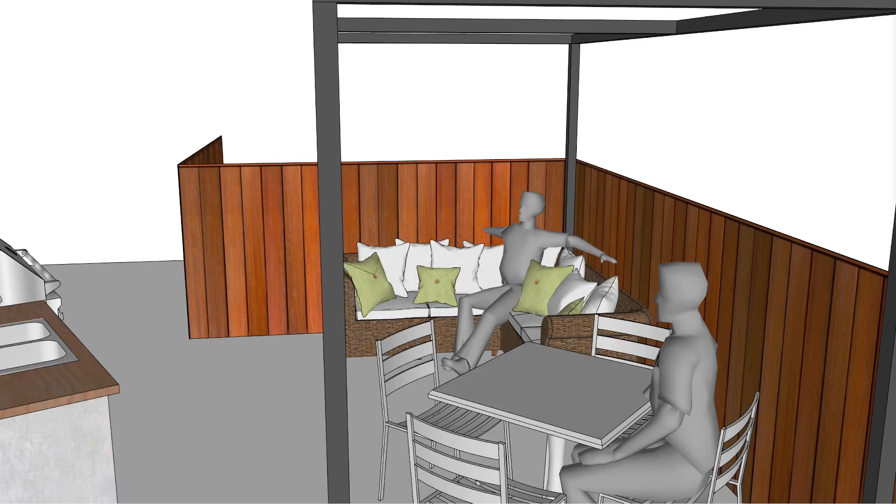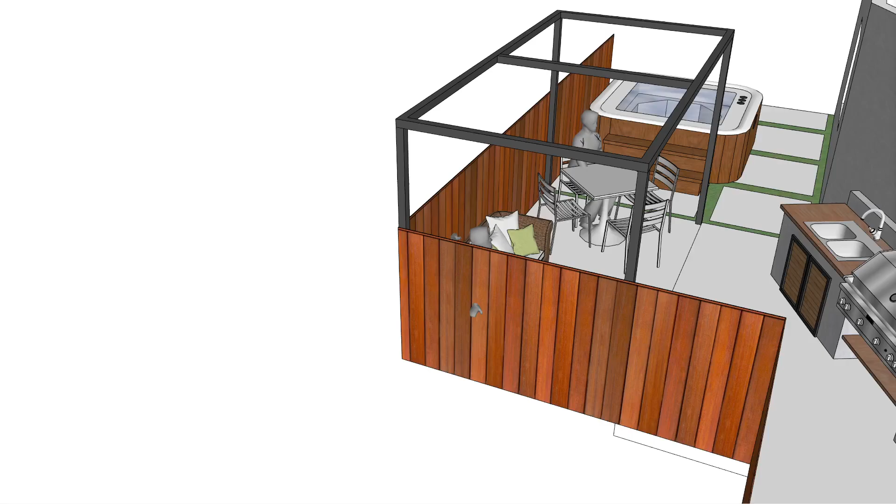Now let's get heating. Okay, so let's go ahead and look at the overall dimensions I received. So overall dimensions are: this section here I have at 7 foot 4 3/4. This section here I have at 14 foot 6 1/2.

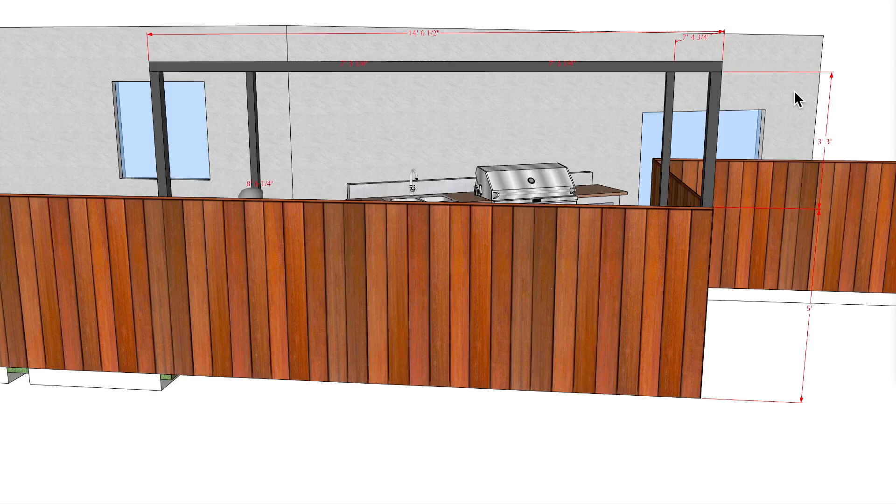And then I put up a fence here. I have that fence at 5 feet tall, and then from the top of the fence to the bottom of this pergola here, I have it 3 foot 3 inches. This is going to be important down the road here.

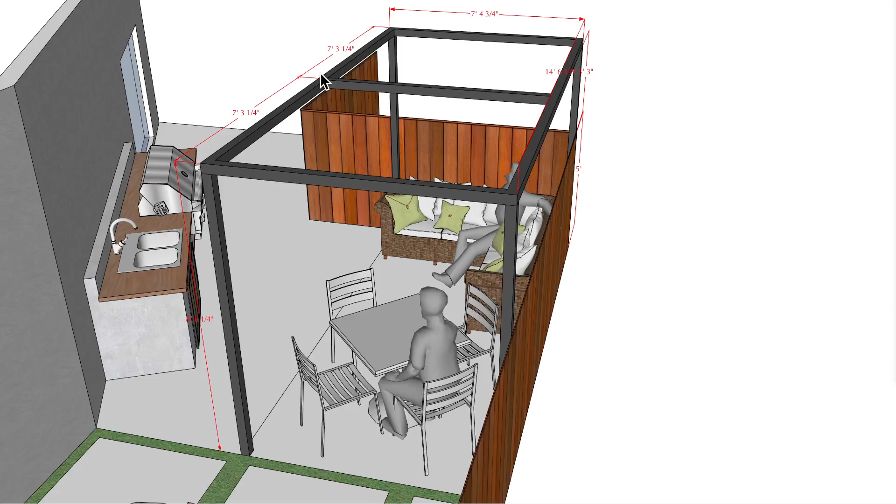And then also I do have a center bar here. I'm not sure if that's going to be existing or not, but I placed it there just in case. And then you can see the two sections over here. Total height I have at 8 foot 6 inches off the finished floor. Let's go ahead and look at a couple of different options.

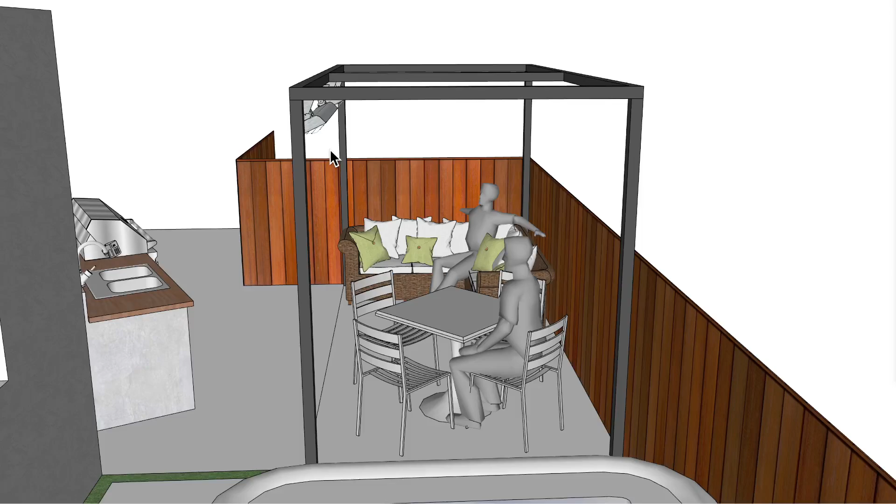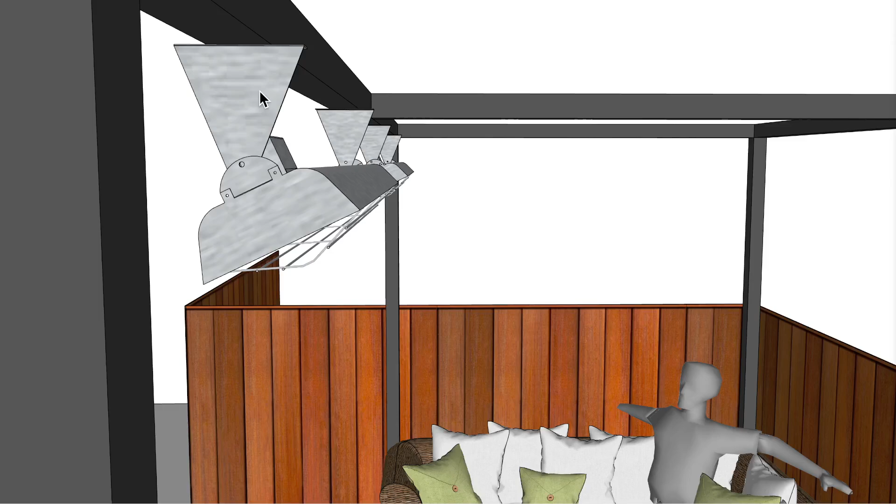So the first option is going to be 2 of the WD5224. They could also be the CD model as well, the CD5224. These are dual watt elements, and you could either do a duplex switch or an on-off switch or even a control system. Now you can see that the mounting plates that come with the units don't seem to really match up with the dimension I have here.

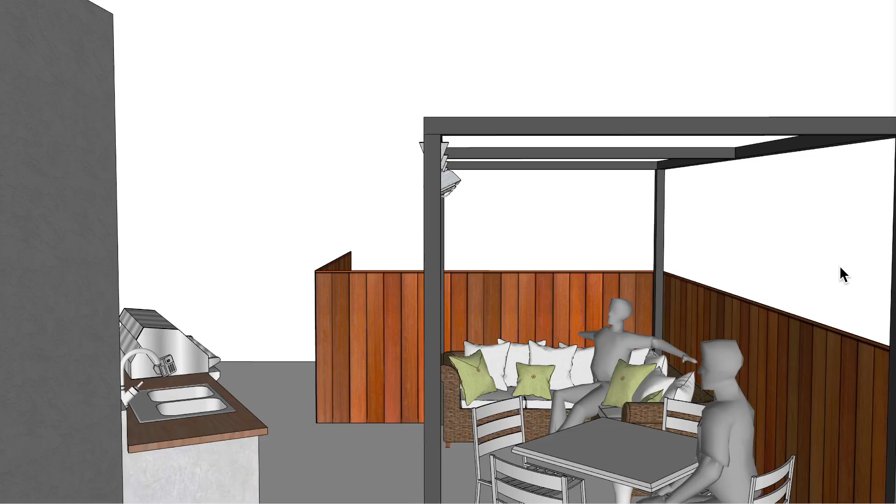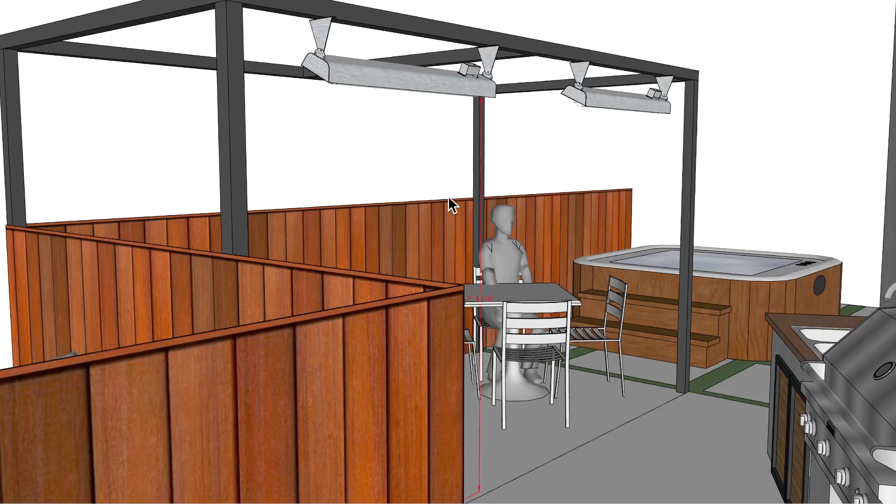I think I have these at 3 inches and these are 6 inches. So you might want to come up with your own bracket or just cut these brackets so that they match whatever that dimension might be. Also, I have these at 20-degree angles, so straight down, 20 degrees in. And then also, I have the distance from the ground here at 7 foot 4 1/4 inch, the bottom edge here.

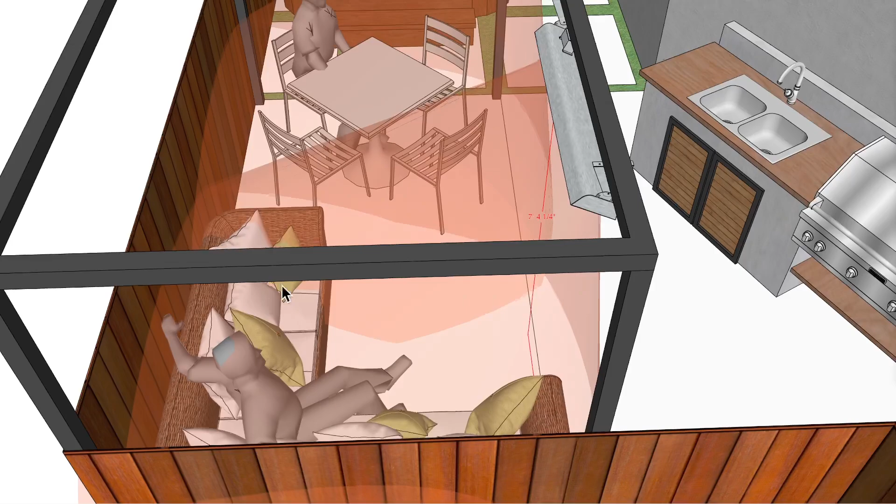And let's go ahead and look at the footprint of heat. So footprint of heat, you can see with these 2 different seating arrangements, I have casual seating here, dining table over here. The coverage would be fairly decent. This would be a warmer spot here than it would be over here, but ideally the coverage would be great for an area on this side over here.

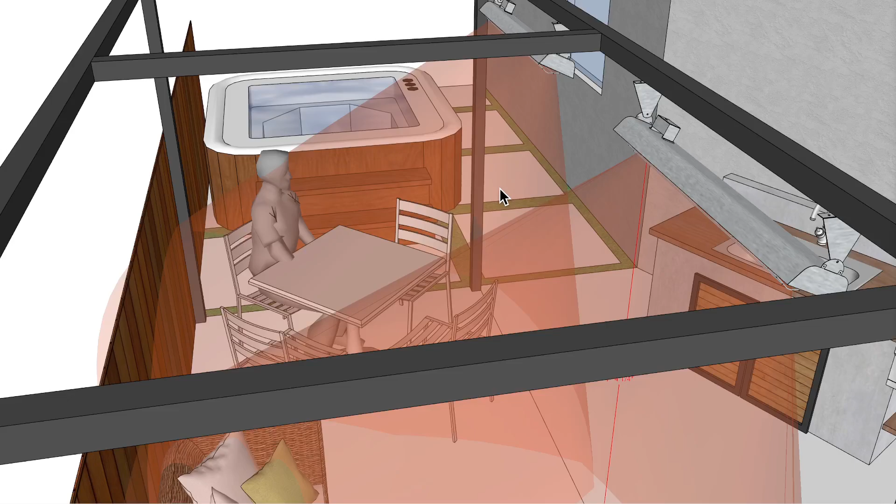Now looking over here, it would be great for the upper body. However, the table is going to absorb that ray of light. This is infrared. Infrared is a light wave, and although it's invisible to the human eye, it does absorb into mass, so tables, chairs, floors, and the human body.

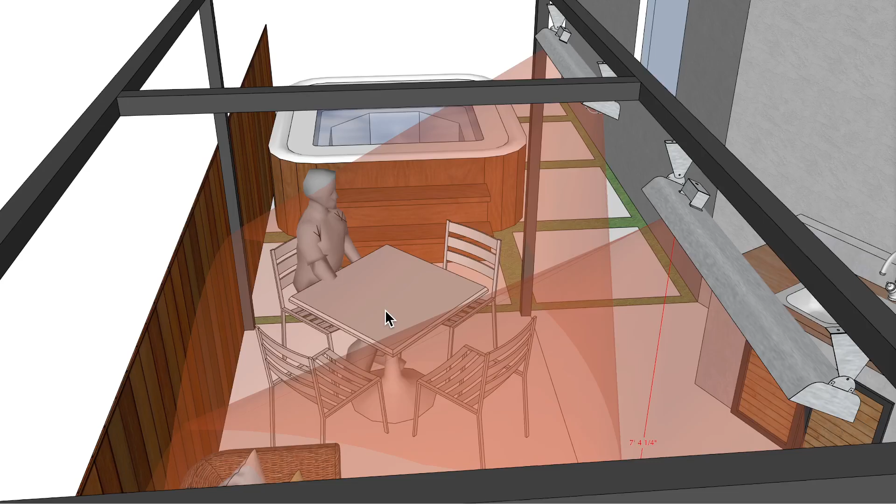And so obviously in this particular sitting position here, the table is going to receive the majority of heat to the lower section of your body. So the upper section you'll feel it, but the lower section you won't, over on this side if it's in this arrangement. Now over here you can see that your whole body is going to feel that warmth, and this would be good for this side itself here.

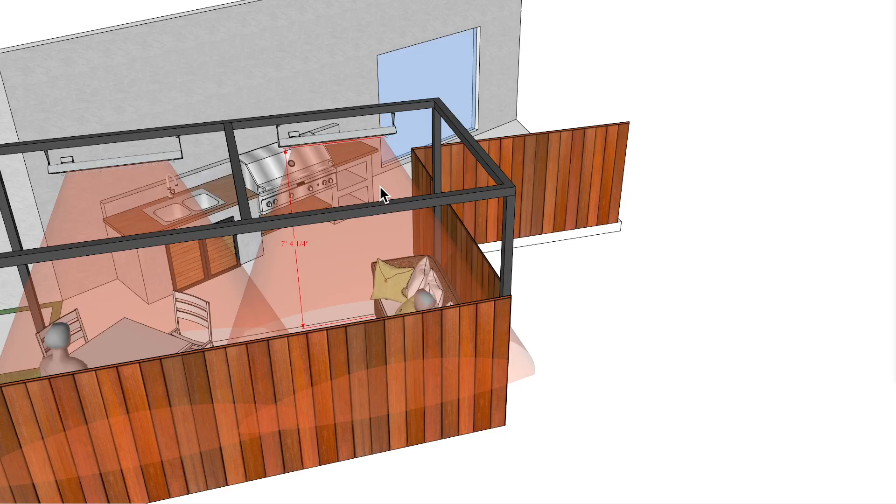So the other thing just to note, if you cut this dimension in half, I have the heater placed in the center of each one of those half sections. So let's see if there's anything else I want to talk about here. I think that's about it. Let's go ahead and look at the second option.

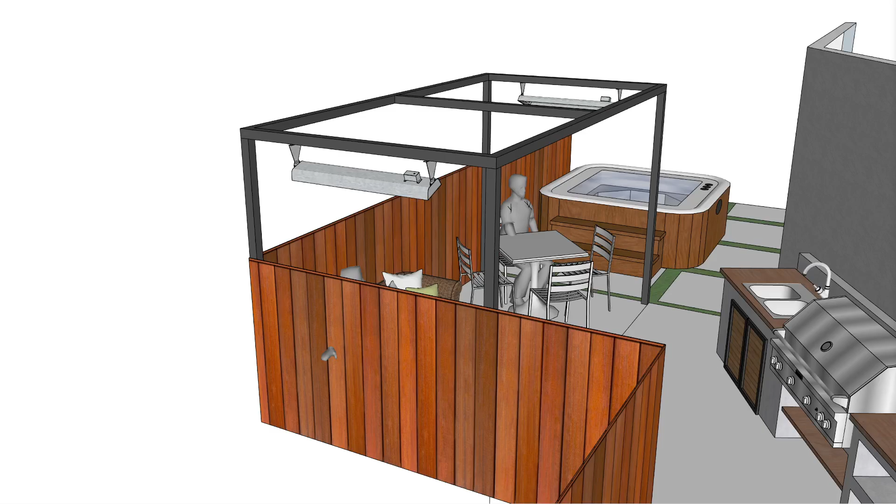And this second option is something that I'm concerned about. That's why I brought up the height of the side fencing here. And we're going to look at the clearance area here below the heater. And you can see that there's 18 inches on all 4 sides of the heater and 36 inches below the heater. And because of this fence size and dimension, you can see that we're not meeting that clearance area.

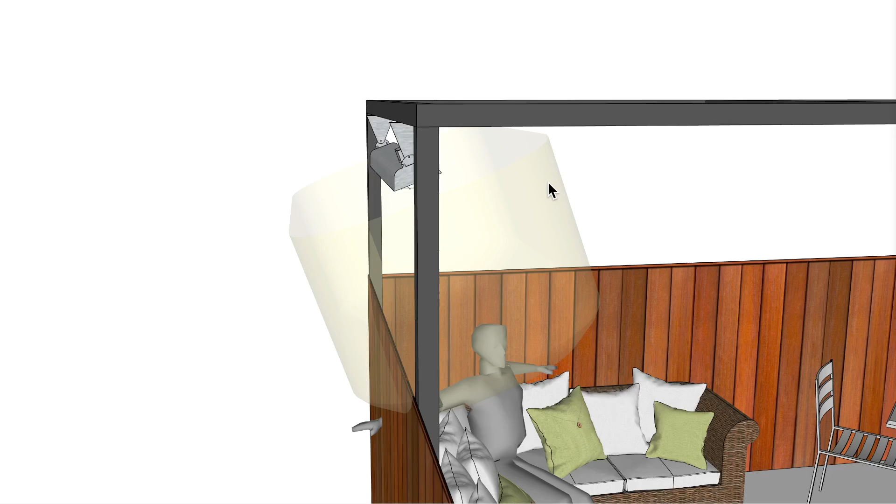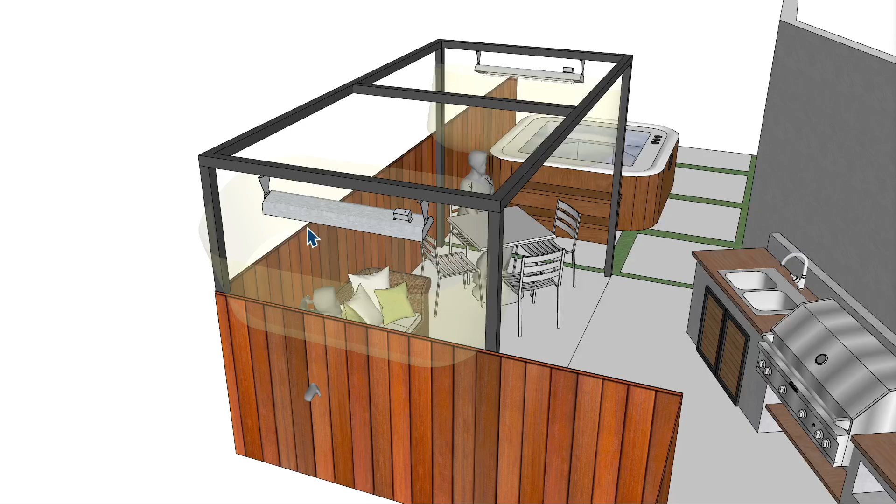So either the heater would have to be pushed into the center portion, something of this nature here, which you'd have to come up with a special type of bracket. But if you can see, I just moved it just 12 inches, and we're meeting the clearances now, but I'm going to place this back just for reference here. Also 20 degrees, centered on the beams going across here.

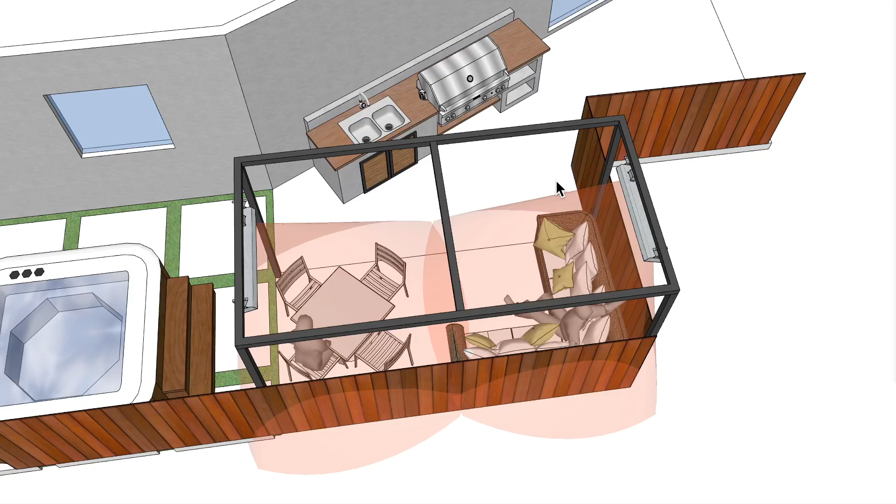And let's look at the footprint of heat. So I'm going to turn that clearance off, but again, that's something that you do have to be concerned about. And then you can see that the footprint of heat is really good for both areas again, but this fencing over here could be a potential issue. But in any case, I think that would work out great, as long as we do meet the clearance over here. So I think that's about it.

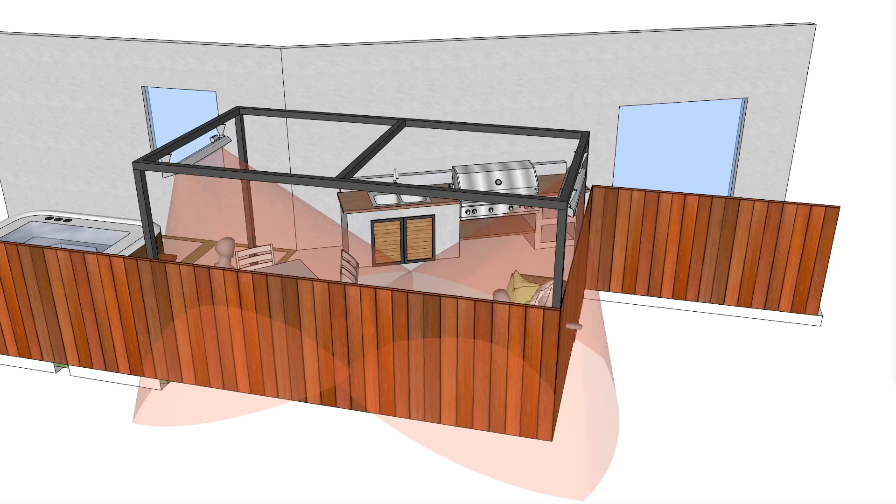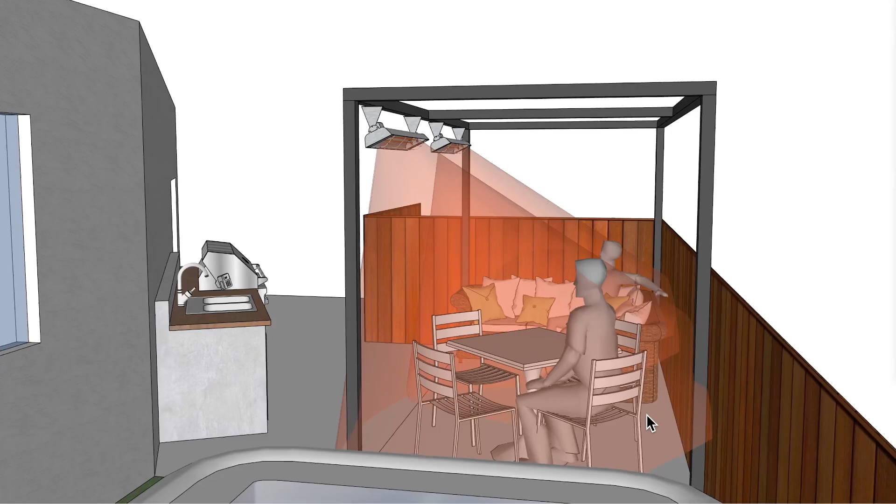I'm going to go ahead and turn that off and go back to this here so you can see that a little bit better. A lot of times people look at drawings such as this, where you're looking from the straight top portion. It looks like the total coverage is even, but again, as the heat ray travels, the distance furthest away, the intensity isn't the same. So you can see here the intensity, I shouldn't say stops, but it is the furthest that the ray is ideally suited for.

And then over here you can see that the ray is actually below grade, so this is a much warmer spot than over here. But I think that's about it.